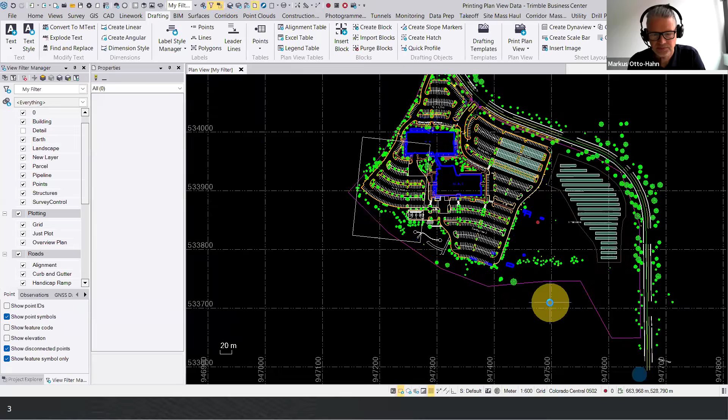We'll first try what happens if I press create. You see that print plan view closes. You get into a new view called sheet view. This is the preview of the plot, where you can also do annotations later.

The simplest way to get to a printout or a PDF is to click this small button at the very bottom right, and check this print to PDF if I want to create a PDF. By clicking OK, the PDF creation runs. That's the first simple workflow to get a fast outprint.

Now I'll do a small variation of this. Again, get to print plan view. Call it window plot. There's always a name given, plan view 1, plan view 2. Sometimes this works, but I would recommend using a speaking name, just to keep the overview.

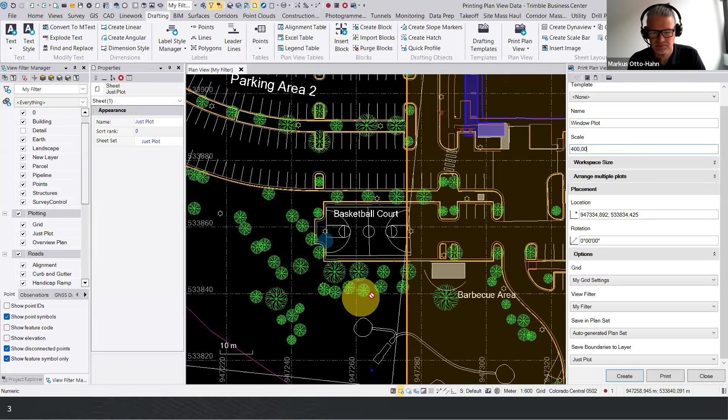What I want to show you is the window plot. I'll just zoom anywhere here to the basketball court. Then I choose here current window. Then you see that the preview covers the current window. And then I'll maybe add a grid this time.

This time as well, I try this print button, which doesn't open the sheet view and brings me directly to plan set, where I can now create a PDF. A small detail about this PDF functionality: it always checks if the name or the PDF file already exists, and then it adds an additional number. So this first outprint was called printing plan view data 1, the second is 2, and so on. But you can always give it an individual name if you want, which I would recommend at the end.

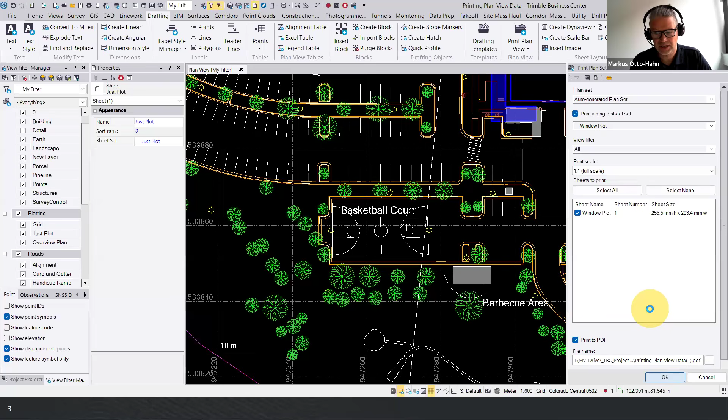So again, PDF output, I think that's my last one. From now on you can imagine how this works at the end of the pipeline.

Okay, what did we create so far? We have in the plan view two boundaries. Here, that's the first one. Oh, it's the second one, the window plot one. It's called window plot. And that is the first one that we created.

If you look at the Project Explorer, you see this in a new node called DynaView Boundary Sets. Here it looks currently a little bit overcomplicated, because you have a DynaView boundary set, and in that a boundary. Again, for the window plot, this makes sense. I will prove this in a few minutes.

Look, if I select here one of the boundaries, they are selected in the graphics. This gives me a little bit better overview of where this boundary is positioned, and the sheet view part, the paper space, the printout preview is handled on the plan set side.

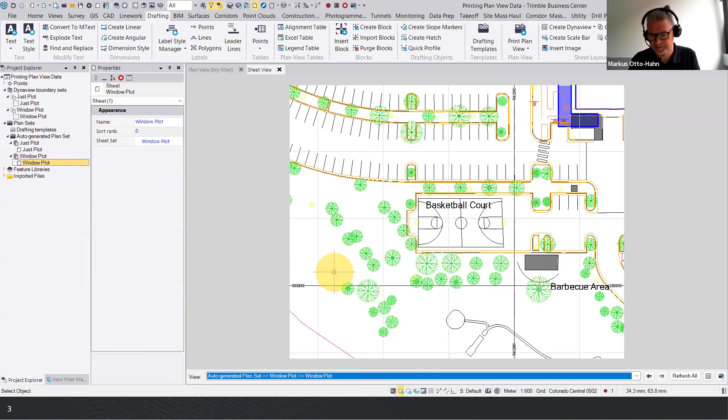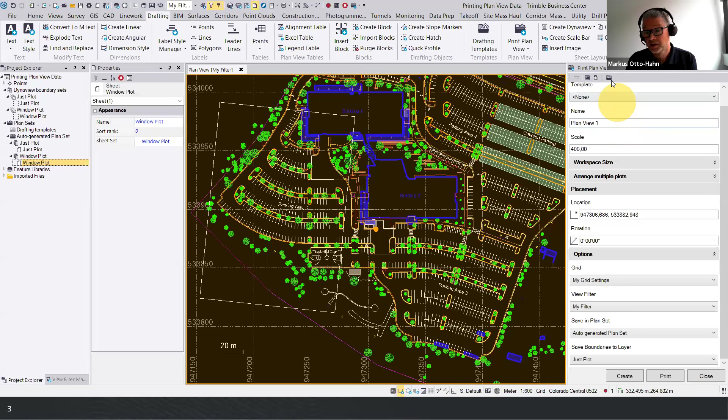Templates can be either stored in the project template, so drafting templates can be stored in the project template, or they can be stored in a folder called drafting templates that can be opened here on the drafting ribbon, or you get into print plan view. That's nearly the only command I'm starting today. And here we've got a shortcut to the drafting templates. So this drafting templates is a folder with templates that we distribute while installing TBC.

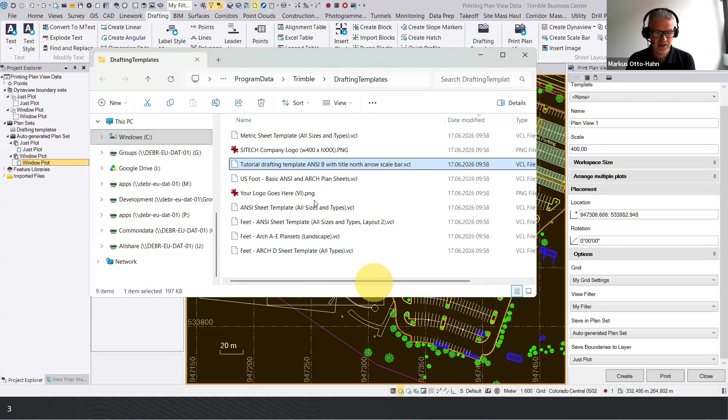There is a lot of different format sizes of plans, not only plan view plans, but as well profiles and cutting and cross-section plans. Regarding the new plot functionality, the drafting template called tutorial drafting template ANSI B with title, north arrow, and scale bar is the most sophisticated. So I put everything in this that is currently supported by plan view templates. And therefore I would recommend you to try this as well.

And that's what we are going to do. I drag this VCL file into the graphic. It's imported automatically. And the drafting template shows up here under plan sets in the drafting template folder. That's the easiest way for this one. Let's have a short look by double clicking on it, how such a template looks like.

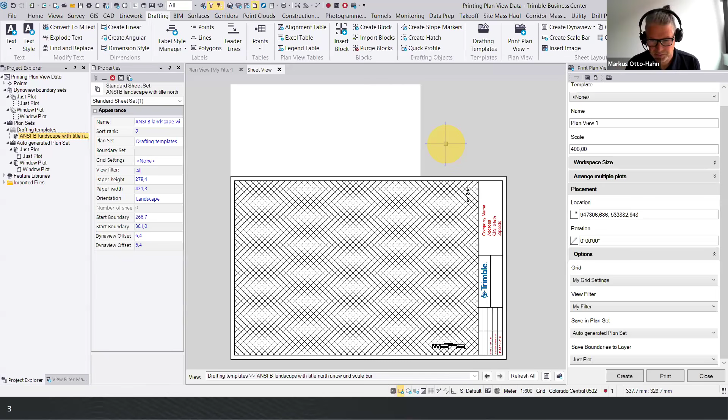Yeah, this one is a small bug that we have. The white area sometimes doesn't fit perfectly. Please ignore this. And so let's have a look at the data. We see some lines there. We've got a scale bar, some text, a bitmap here, a big placeholder for the map to be created.

That's the workspace size that I'm using. Text, bitmaps, and so on. And here in the properties, you see as well additional definitions like the paper height, width, what is here called start boundary width and start boundary height is exactly the area of that placeholder. Then the Dynaview offset is the position of it.

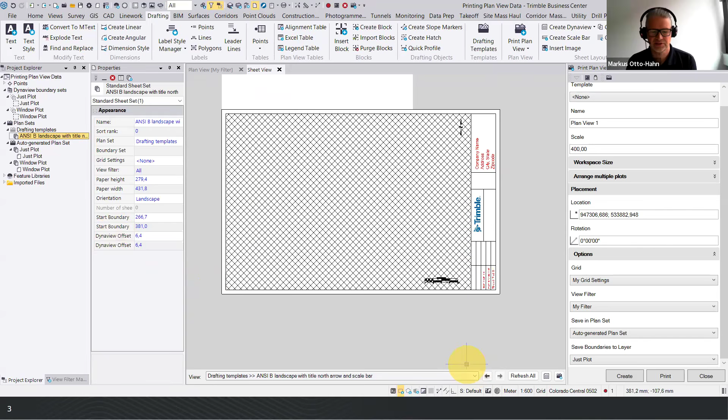I close this, and having imported this and having this under drafting templates, I now have a template here to choose. And maybe you have seen this. As I chose the template, the preview is adjusted automatically because the template contains an area for plotting a workspace size. Yeah, so this means here it's automatically set to custom.

It's read out of the template, and normally I would not manipulate anything else once having used these templates. So I normally close this, and I have only to care about the scale. Let's use a special scale just to show something later, and we call it 'with template'. The blank.

So we skip arrange multiple plots until our next going through this project to this command. We locate it somewhere. Locate it here. Again, the rotation. Let's start with this rotation. No grid. View filter. And that's okay. Just plot. Oh, everything's fine. So now I go to create.

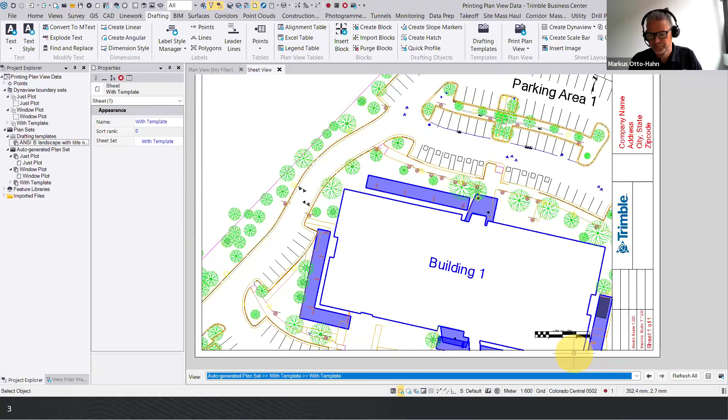And you see how this works out. We've got here the template now filled with the plan view data. You see here the scale bar. The scale bar is an object in TBC. You can select and manipulate it by a lot of properties here.

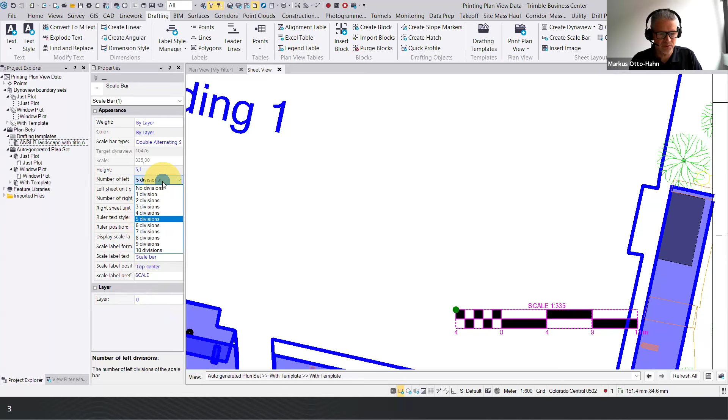So let's, for example, change here to a scale text. So now we've got it displayed here. And as well, maybe change here the number of divisions, whatever. Yeah, so it's a very interactive object that you can position and it just reflects the scale of the printed map. So another way to express the scale is using text.

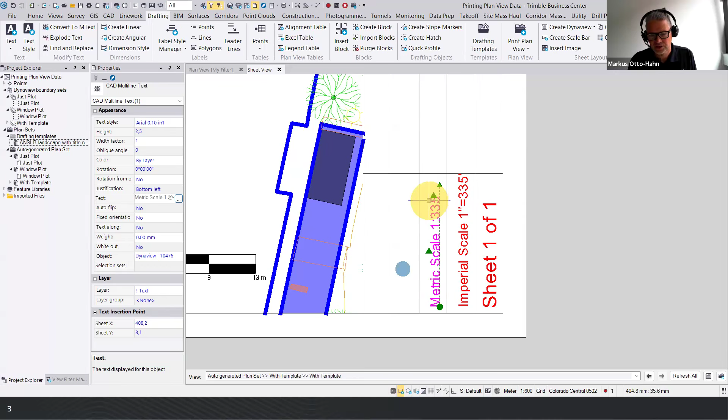What we did here is we used so-called smart text. Smart texts consist of plain text on the one hand, and on the other hand of formulas. Here we've got a formula for the scale number in it, and you can use these for this kind of scale format or for this kind of scale format. It works in different ways.

Here, if you look at the sheet counter, we use another formula on the one hand for the current sheet number, and the second one is for the total count of the sheets.

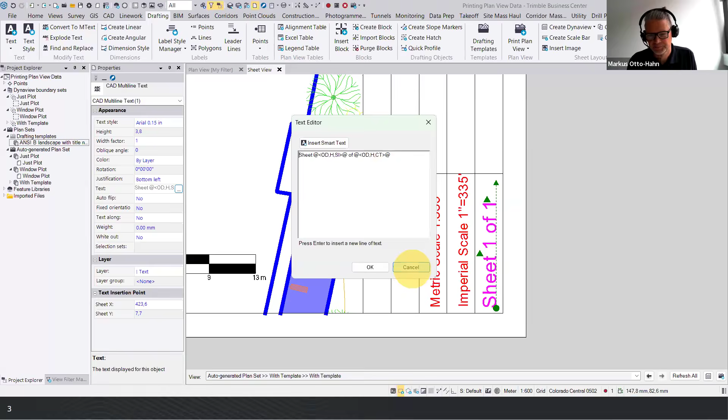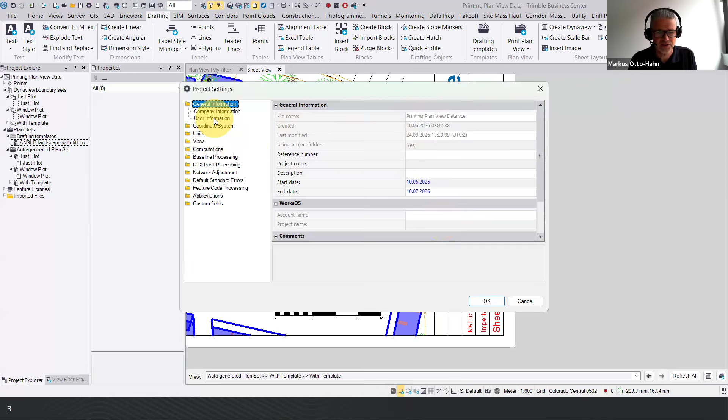You can also work with a lot of additional smart texts. If you go to the project settings, nearly everything that's in the general information, company information, and user information page can be displayed on a sheet by using these smart texts.

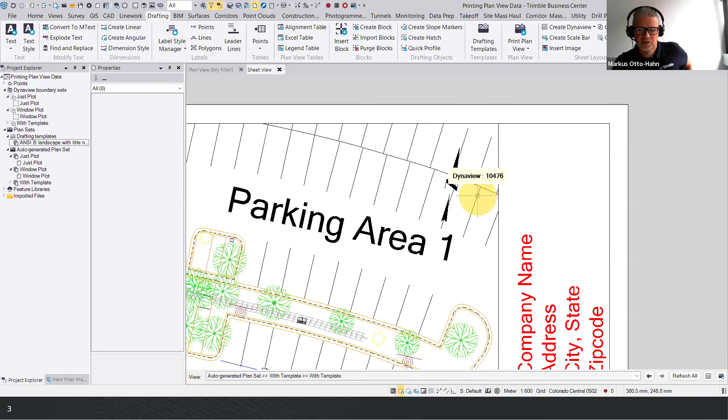So then we've got here a bitmap, that's nothing special. Then we've got here the north arrow that has inclined a little bit if you look at it.

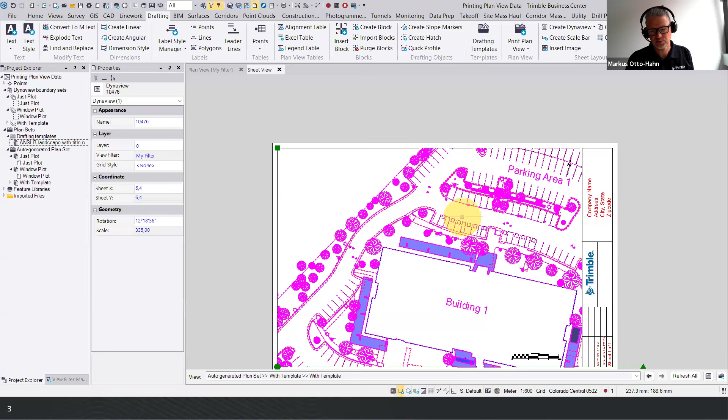And then in the big part here, we've got the dyna view. The dyna view, to give a definition, is more or less a window to the model, to the plan view, most times the plan view. This window works automatically and dynamically, therefore it's called dyna view.

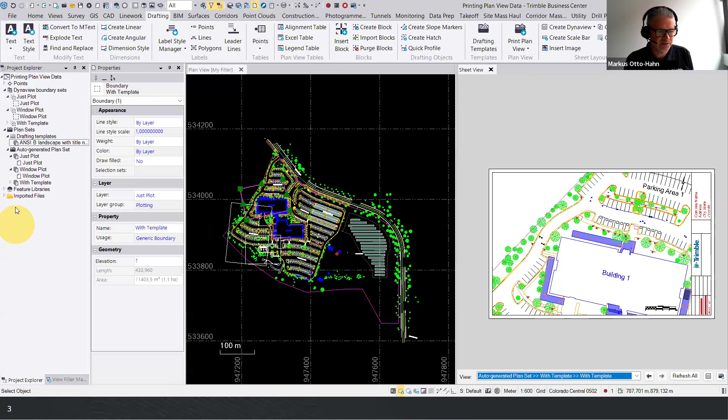I want to show you this by grabbing here the boundary that belongs to that sheet. If I don't know which boundary belongs to it, just a trick: I go to the sheet, check which sheet am I with template, that one. In the properties of the sheet, I can click here at the top, and then jump to this referenced border boundary, and then it's selected in the graphics.

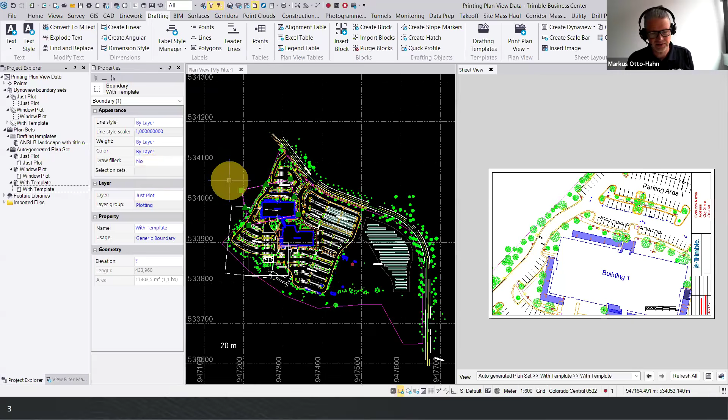And now I want to reposition this. First I hold Control, take it, and move the whole thing. And as you see, this dyna view automatically adjusts, which means I can, after creation of such a boundary, still manipulate it.

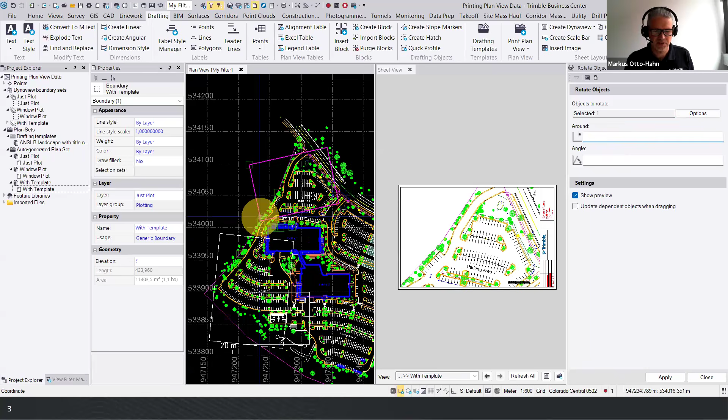I hold the Shift key, right click on it, and can rotate the boundary. Let's rotate it a little bit around here, and let's zoom in here a little bit and look what the north arrow does.

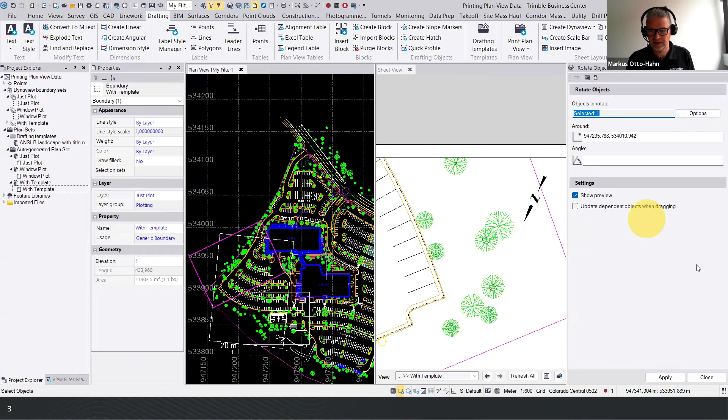Let's go first to this. Isn't it fantastic? The north arrow inclines. That's something, I think, that one should always assume the north arrow does, but it didn't always in the past.

One fantastic thing about TBC, what I really appreciate, is the undo function and everything around plotting. You can do this until the last saved state. That's a really great thing from my perspective.

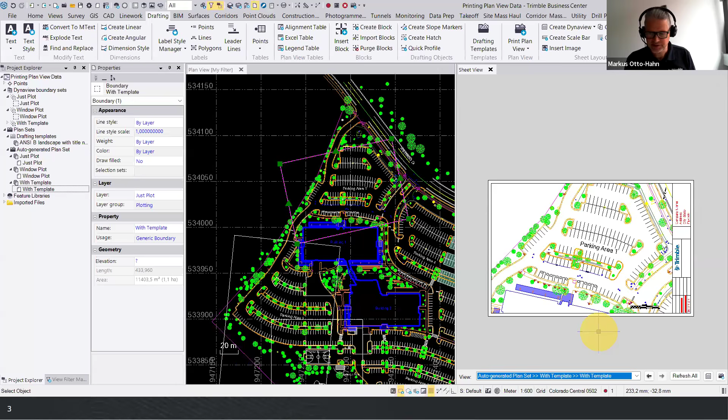Let's get back to this. Last thing about this dyna view: let's get into this. I said that's dynamic - the dyna view updates its graphic automatically from the graphic. That is true in 99% of all cases.

In one case it's not true: if I manipulate data directly in the plan view and have that sheet open, that displays that area. So I'll show this to you. If I manipulate this line, it's not automatically updated because it's already loaded in the graphics, and the reload shouldn't happen all the time when I do something here.

Therefore, in this 1% case, we've got here the refresh all functionality that reloads the data. This would also happen if I closed the sheet view and reopened it, and even in printing it refreshes automatically - just to explain a little bit what this refresh button is for. Then I undo, refresh here, and go ahead to the next.

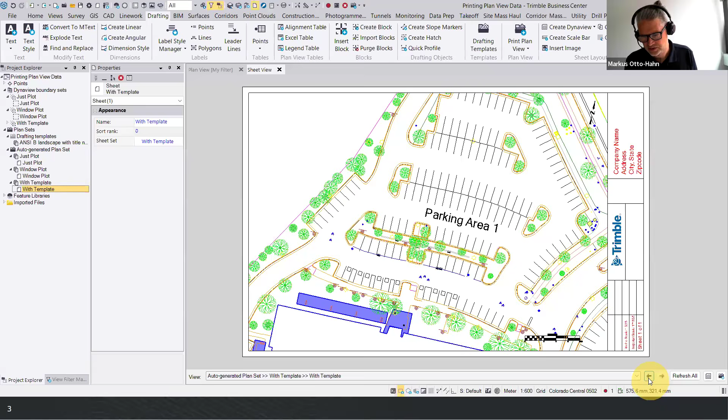Last thing I wanted to teach you about templates is the sheet set, which I've skipped all the time. So I said always here there are the sheets, and if you browse here, you only browse between the sheets, as you see, but in the Project Explorer you can also select the sheet sets, and they have a different appearance than the sheets.

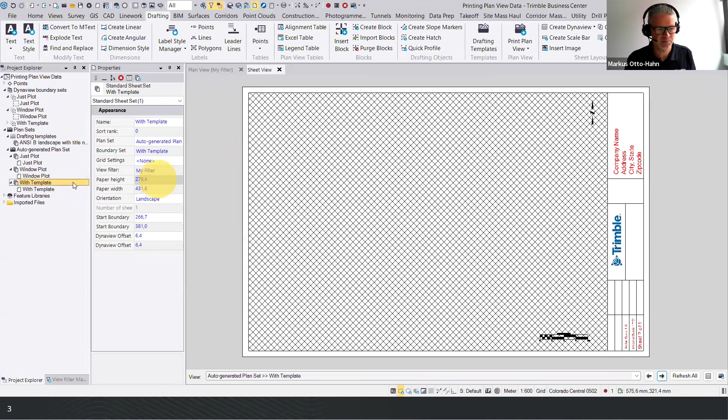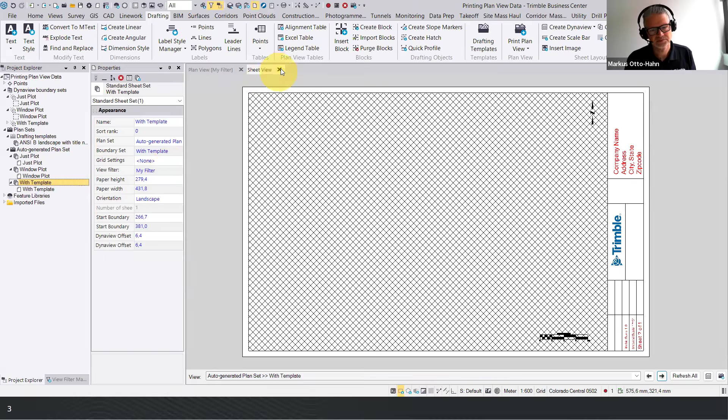What you see, and what is true, is it's a 100% copy of the template. So if you use a template, it's copied from the drafting folder to the plan set that you are using, and it's renamed - that's all. And the sheet set, as I said, somehow governs the behavior of the sheet below it.

Now let's increase our productivity a second time by doing multiple plots at once. I switch off the layer just plot, where all the boundaries were created the first time, and get back to print plan view. I still work with a template because templates are fantastic. I give it a name, an array, scale, whatever.

And then, for the first time, I open this section, arrange multiple plots. There I got two options: in an array or along a line. This will be our first case. This means I can define here an array.

This was formerly called grid, but the grid is as well on the map itself. I can define here an overlap in X and Y and locate the whole thing.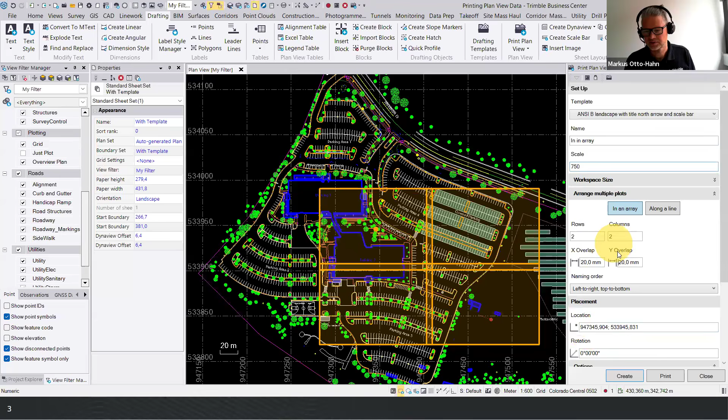My plan was to use here 750. That was it, scale. Place the whole thing, and then you see perfectly what you want to cover. I can rotate it if I want to move it a little bit more in this direction. And then look at the options - my grid.

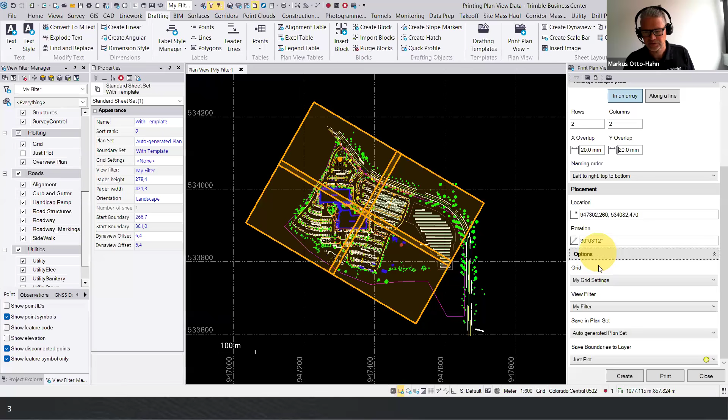My filter - I create another plan set because I want to show you what plan sets are. This means I'm calling this in an array, maybe. You see here, it's just another folder that was created under plan sets.

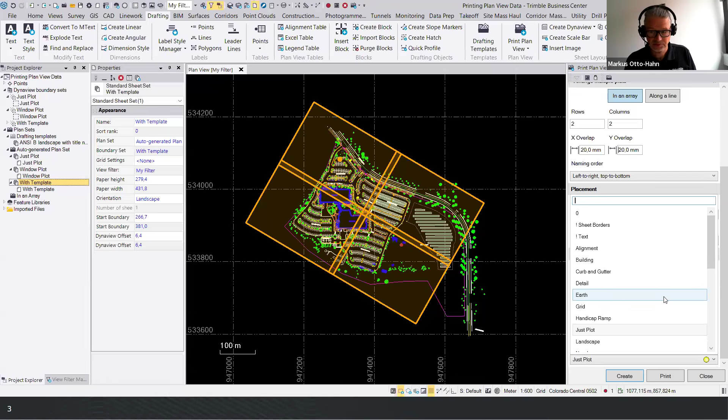And I create a new layer. I do this by typing the blank key. You can type something, and at the bottom of that list you get the new layer entry, and I call this now array boundaries.

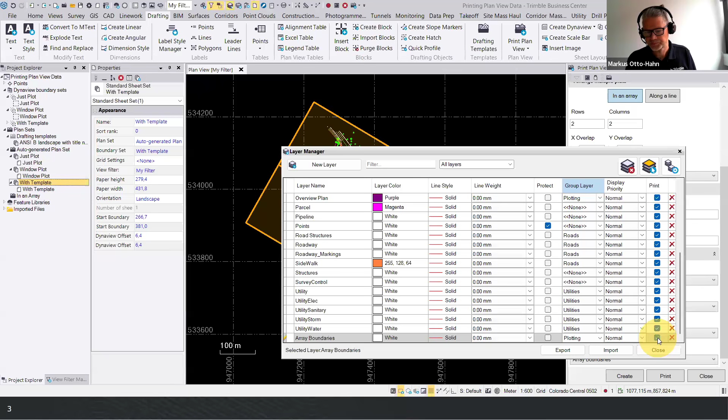Group it under the plotting group, and then I do here a check, which means do not print the boundaries of that. Do not print the layer, do not print the boundaries. Therefore, I uncheck this area. Otherwise, if I would have checked this, the boundaries would appear on each other plots.

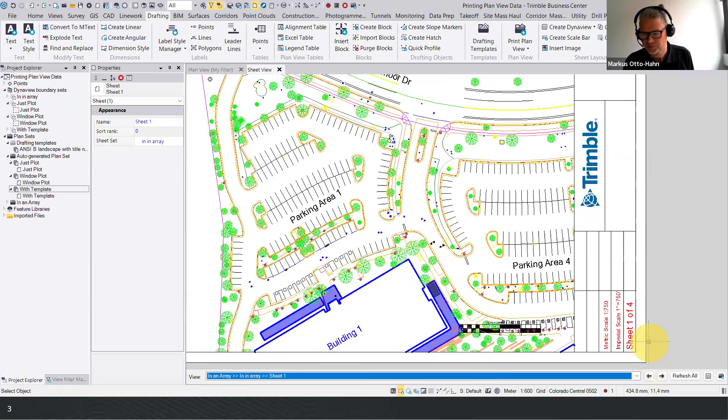Then I go and click on Create, and then the 4 plots are created automatically. You see always that the north arrow inclines. Yeah, we've got now the first reasonable usage of the sheet counter. Then you can browse through all of these sheets.

Let's have a look at my notes. Yeah, back to the DynaView boundary sets. Let's look how they behave here on the Project Explorer side.

We've got here - oh, I get a little bit nervous with all these arrays and thumbs up. Thank you very much, I have to hide them. Okay, where am I? Okay, here we are in an array.

Here it's the plan view, and you see that we have created a DynaView boundary set. We can switch or browse or click through the boundaries. There's an option as well: select members, to quickly see which boundaries belong to this DynaView boundary set.

And we have created here in a new plan set that sheet set, and here we've got 4 sheets. Yeah, and again, you can either use the browse buttons or go here one by one and see how the sheets look like.

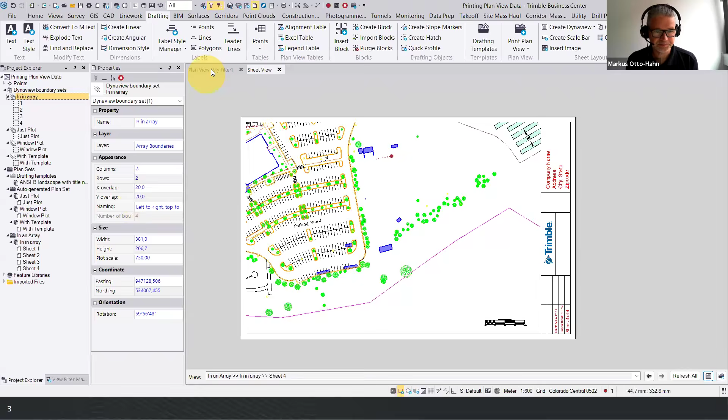Now a few secrets about DynaView boundary sets. Let's go up here. The DynaView boundary sets store the conditions or the properties when they were created. So here you see the properties, and I can change them afterwards, at least if I haven't manipulated them too much.

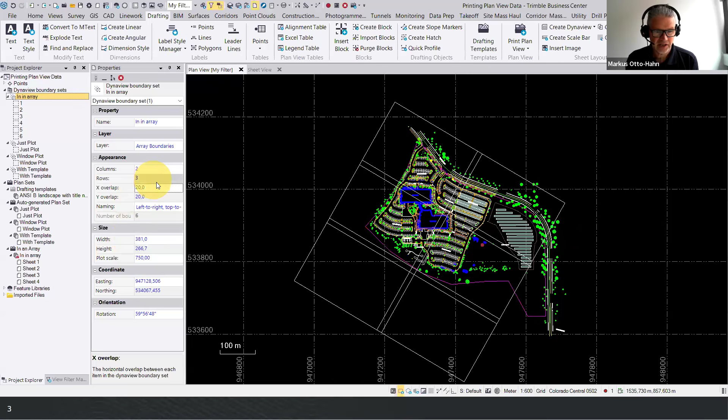So if I want now to have 3 rows, it works. I could change the overlap, I could change the rotation - all of this works. Even the plot scale could be changed afterwards.

But if I manipulate something here, what might happen is that the plots do not automatically update. So I've got now 6 of them, 6 boundaries, but only 4 sheets. And how could I solve this? I right click here on the sheet set, and then I say build sheets, and then the additional ones are added.

But I do not want to have 2 additional ones at the bottom. Therefore, I click undo, get back to the original situation. And I want to have an additional one on the right-hand side, only 1.

Just to mention it, you can as well delete some of them so that this works. Normally, sometimes you have to delete the respective sheet afterwards as well. So sometimes it's good, yeah, with software.

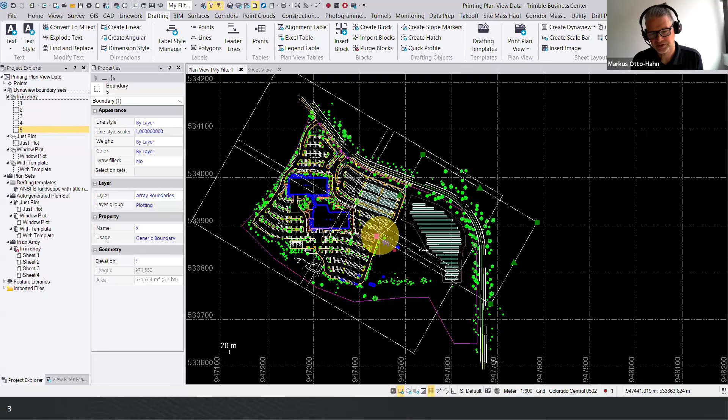Then we have here add new boundary, and then in the middle of the current page an additional boundary appears. So I would always hold the control key, then you can shift the whole thing. You can manipulate the shape afterwards, but I do not know if this is a real use case.

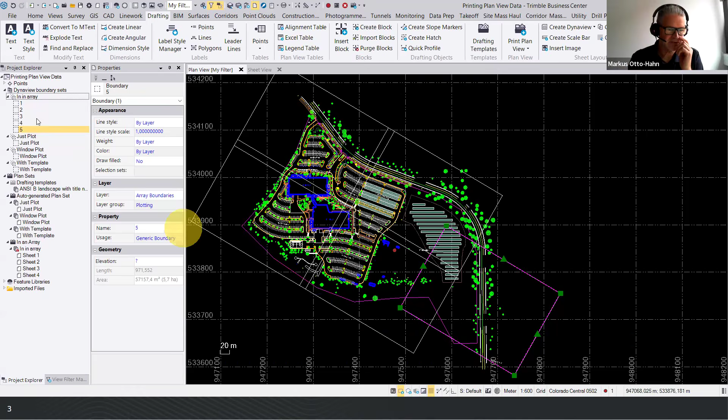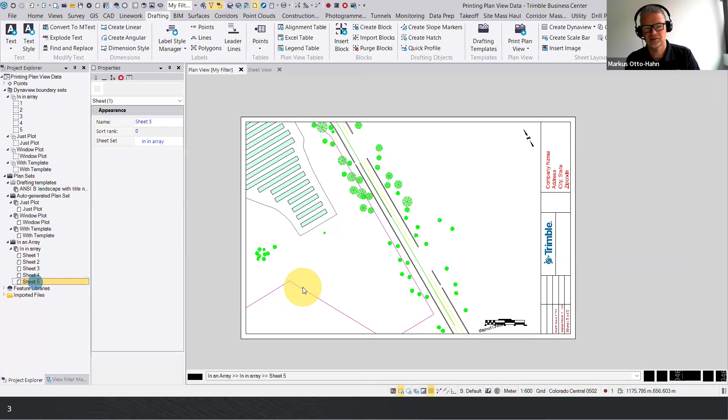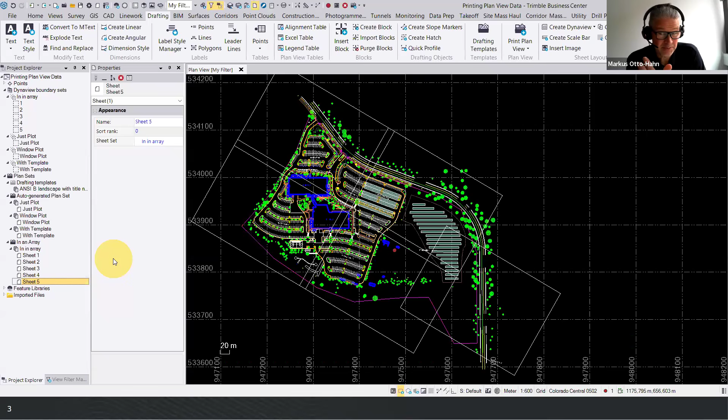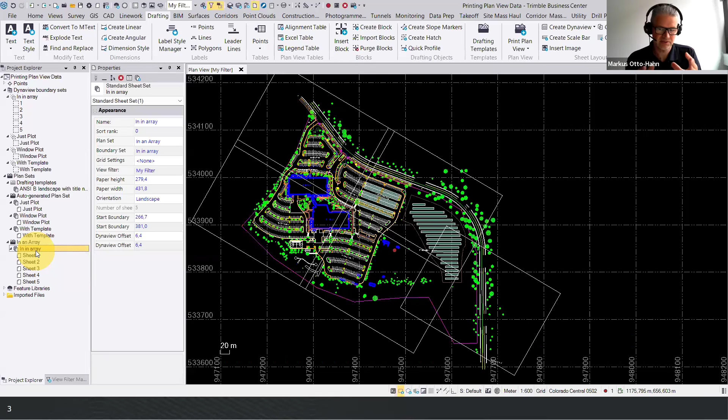If you see here, we added this fifth one. We have to rebuild the sheets here, and then we've got that fifth sheet. So maybe you've seen this small red exclamation mark on the side of the sheet set. We've reduced, from my perspective, 80 to 90% of the cases where these appeared. This exclamation mark says you need to rebuild the sheet set - something changed on the DynaView boundary set. The downside is if you've added any annotations on the sheet, they will be lost if you rebuild. We've reduced the most cases where they appeared formerly, and I think this is much more usable and user friendly now.

Let's get to the last multiple plot functionality. Switch off the array boundaries layer.

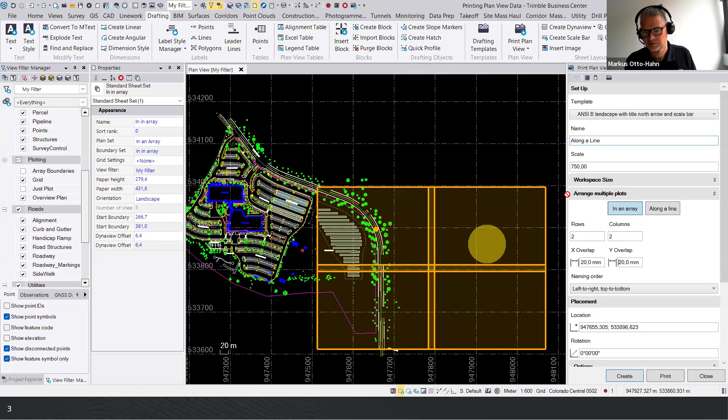Start print plan view, always the same. Give it a name along a line. Scale - now we make smaller ones. And here in the arrange multiple plots area, you can choose along a line. There you choose a line. Don't need an alignment or anything else.

You just click on the graphic, and if you click it, you see the software tries to arrange this as good as possible. However you like this or not, you can always afterward manipulate the individual boundaries, move them, add additional ones, delete ones - this always works. But that gives you a good starting point.

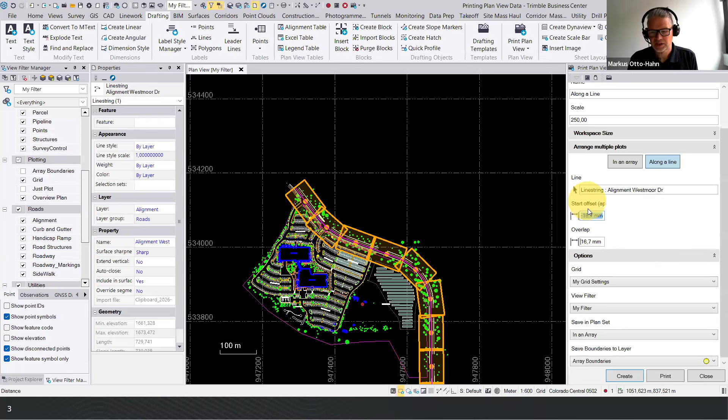Here you can enter additional start offset. So here the line starts somewhere, and the offset is negative away from the line, and on the line it's positive.

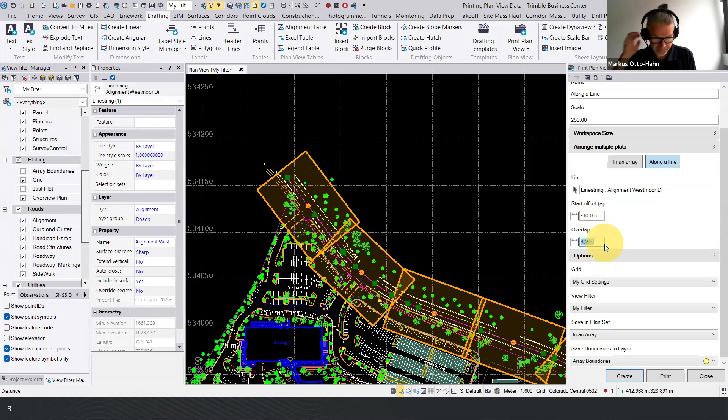But if you do not want to enter sheet units here, there's a small trick. Go here, go to ground, and then you can enter 10 meters, for example, as the unit. Let's work with an overlap as well, with 10 meters, and you see it's all adjusted automatically, and you've got a good starting point from here.

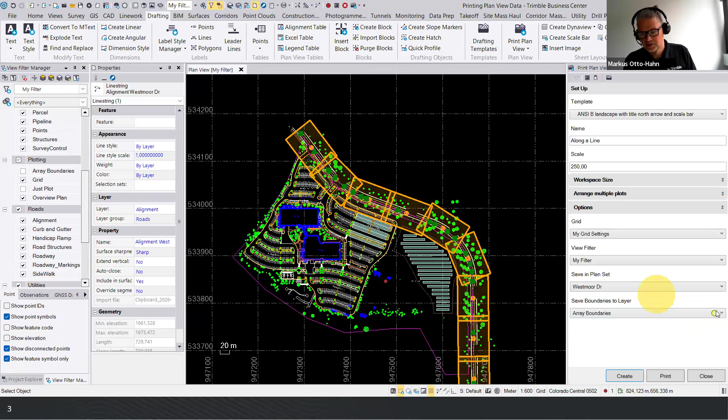Grids, filter, new plan set. Let's create a new plan set. I just want to prove to you that it can be named whatever - it's Westmoor Drive here. And the same with the layer - new layer, Westmoor Drive, again in the right group. So this keeps a little bit of order in the whole thing.

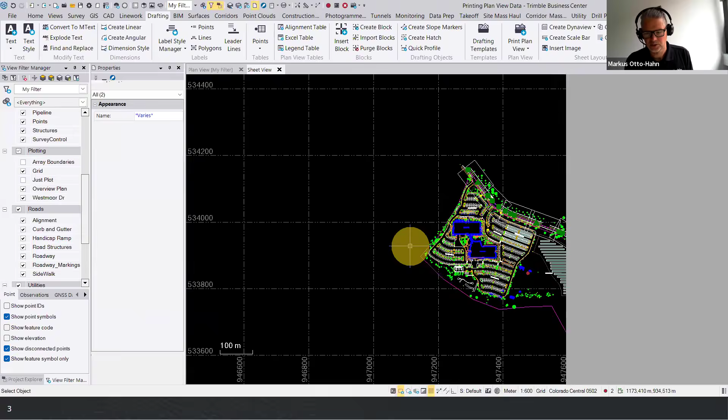Then go to create, and it automatically creates 9 of them. Click through them, go to print, and they will all be exported, or if I go to select all, be put in one PDF file. That's that.

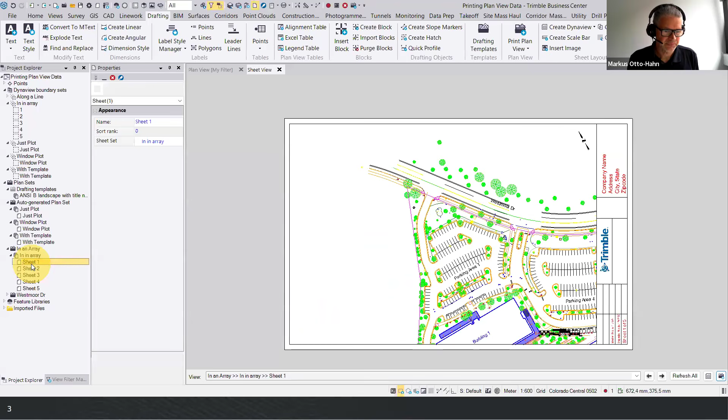I've made a note here to show you again, because repetitive showing makes it easier to learn something. This is how to come from - where are we here - Westmoor Drive along a line. Let's say we're starting from the second sheet, and I want to know which boundary relates to that. I go here to that list, go to that, and in the plan view it's highlighted, and as well here we are on the DynaView boundary set list. That's it.

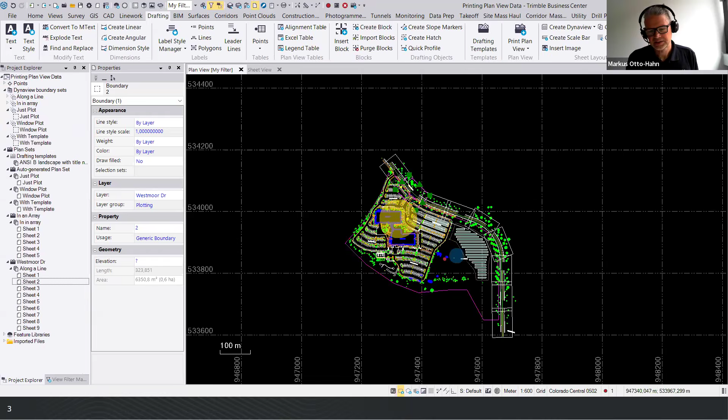Last point today - what I'll show in TBC Live is the creation of a detail plan. Mostly that's not really new, but we implemented it more as a workflow. So let's put it more in a workflow.

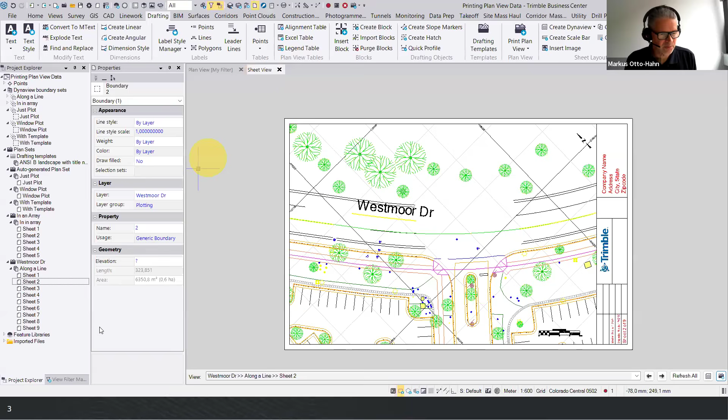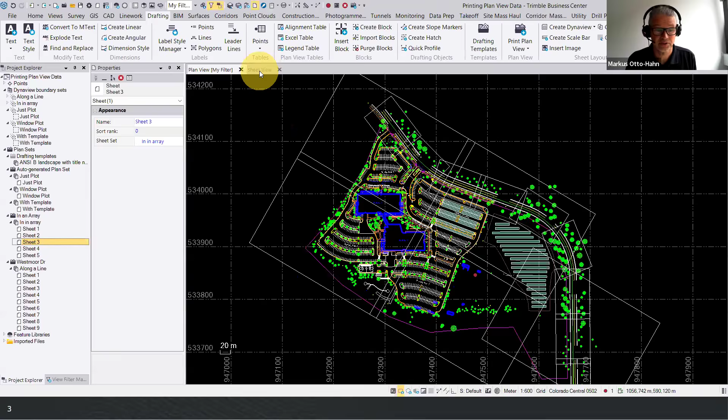Okay, we are in the sheet view. We look up sheet 3. So if you're unsure which sheet you want to put something on, you go here and display it. That's the boundary I want to get to, and from here you can jump directly to the sheet. The sheet is highlighted on the Project Explorer - the highlighted sheet on the Project Explorer is always displayed on the sheet view.

Here we are. And here I want to have a detailed plan of that area - let's say this. Therefore I have here a new button called Add DynaView. It jumps into the already existing create DynaView command. It brings the plan view to the front automatically.

And then it asks you to choose a frame. Here we wrote frame on a plan view - that's not 100% true, I'll have a slide for this later, but most times that's right. Then I needed to have a frame, some reference frame, and the reference frame for DynaView can be any closed line feature in TBC - closed polyline, closed line string, whatever - or a circle.

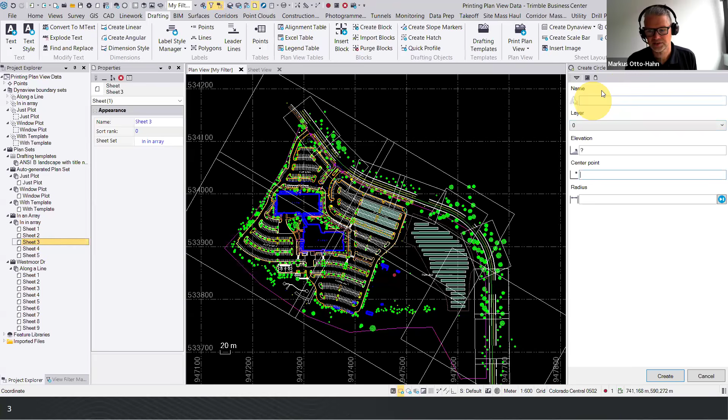And then we've got here the create circle functionality directly linked into this. I get to the center where I want to display, click the center point, select the radius, done. Close the create circle command, select this frame, choose a scale. This is something I tested beforehand - what works?

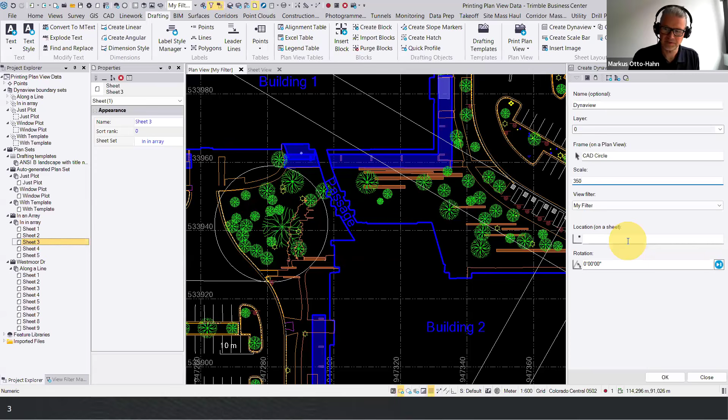Choose a filter, and I prepared some additional data on another filter. So let's get to that filter. Filters are very powerful functionalities in TBC. If you don't use them already, maybe that's a good point to start using them.

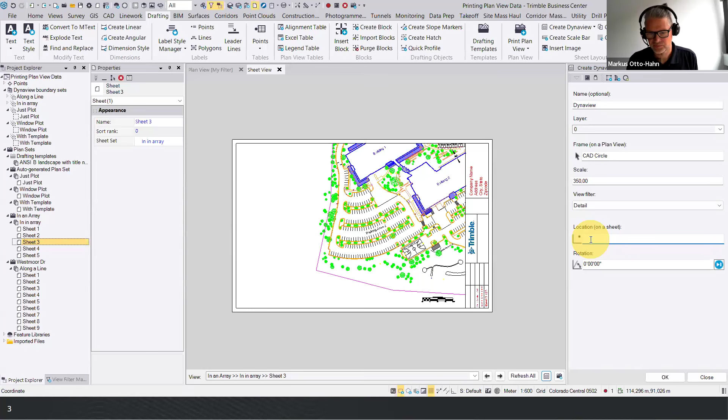As I click here now in the location field, automatically the sheet view is brought into the front, and you can locate your view. Always press OK here, this is maybe something one needs to remember. Then you got your Dynaview, your details displayed here.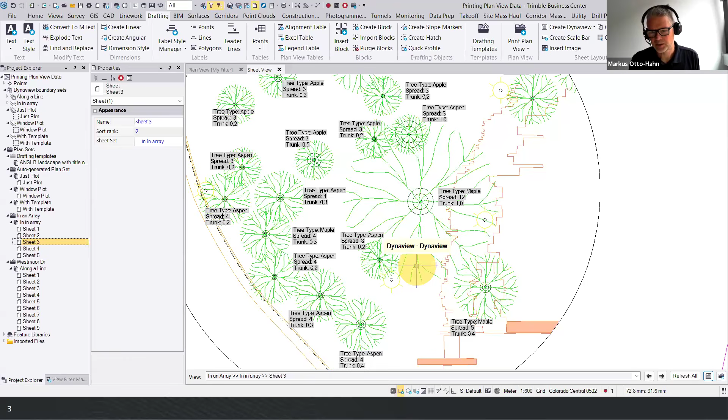On the side, you see that there are additional texts. These texts have whiteouts. These whiteouts, due to a small bug in this version, look on the sheet view still gray, but in reality and on the PDF and in the plot, they will be real whiteouts. This works.

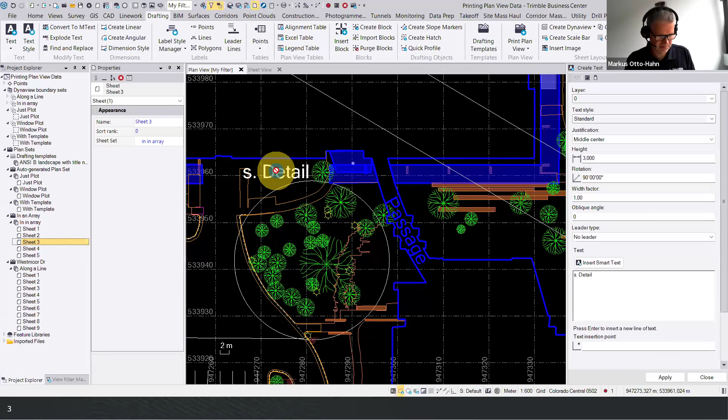Last thing I could do is add, either here or there, additional text, like 'see detail' or something like this. You could do this either on the sheet or on the plan, maybe rather on the sheet. And to see it here, as we learned, in an open sheet you need to click refresh once. That was it.

It's not all, but I hope it's still convincing, and I'm looking forward to your feedback. I haven't shown everything and not explained everything in TBC about plan view plotting in this presentation.

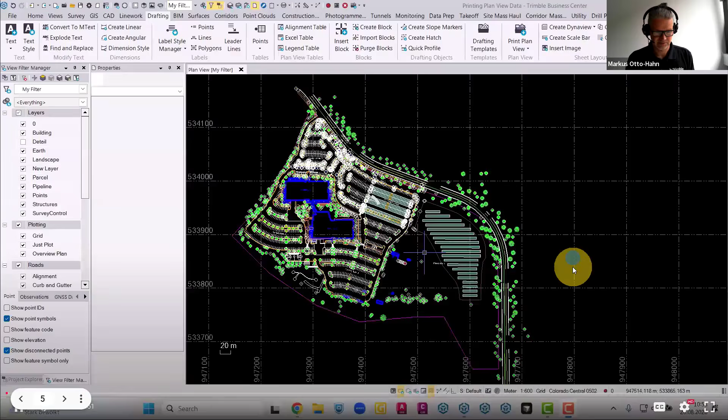All of this presentation is more or less a promotion to get you started with this functionality and to look deeper into the tutorial, because two weeks ago we released a tutorial on that. What you can learn in addition to what I've shown today in the tutorial is more about plan sets, sheet sets, dyna views. You can learn how to create your own template, how to upgrade an existing template, so a 2025.20 template for print plan view, because you need to tweak this a little bit.

How to create an overview plot. Now we've created a detailed plot, but maybe you want to have an overview plot as well, and also basics on profile and cross-section generation, and much, much more. How to get there: you get into the support tab, go to tutorials, and then scroll down until you find 'using CAD and drafting features', expand this, working with drafting, that's it.

Back to the slides. My slides are gone. No, my slides... yeah.

Something that we have implemented in this version as well, 2026.10, and which I now dare to show you because all of the other things worked, is a functionality for how you get, for example, 3D views. This works with all views in TBC on a plan. Maybe that's not yet perfect, but I would try it.

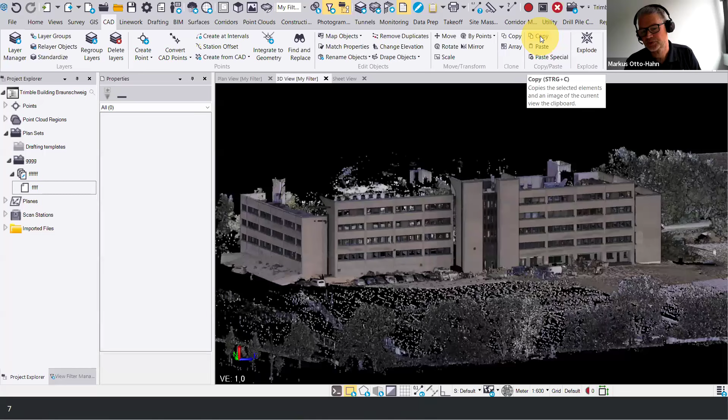Is the copy paste functionality? Yeah, we have implemented here on the CAD tab a copy paste and paste special functionality as in most Windows applications. Copy does, on the one hand, copy vector data, which you can then paste in different TBC projects. But also, as you press copy, a high resolution screenshot is made, as you see here. Takes a few seconds.

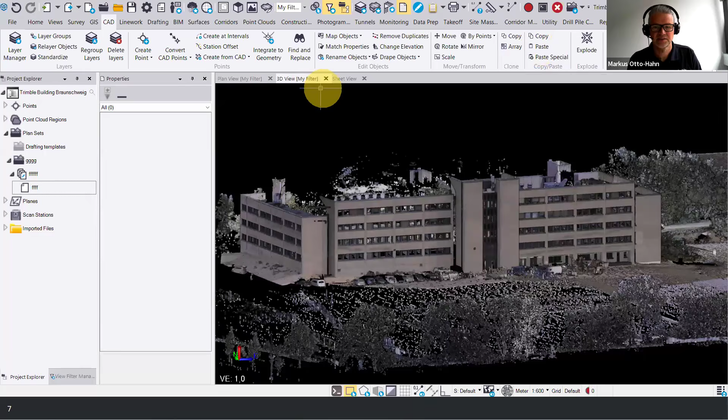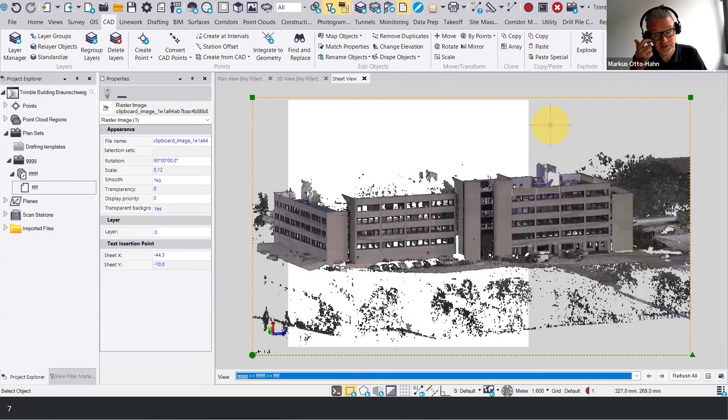And once you have done this, paste functionality is enabled. And if you paste on a sheet, this is a very simple sheet, then always the bitmap is preferred, so the bitmap is pasted. If you are unsure what to paste, use paste special. But in this case, I can tell you just use paste. Then you can position it on any existing sheet and print it. And this works not only with 3D views, but as well with other views.

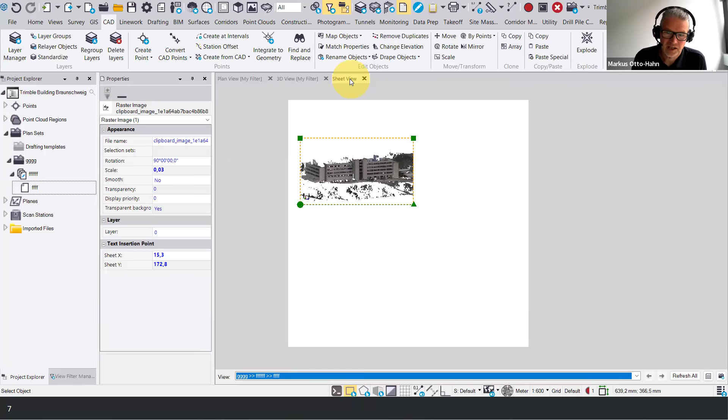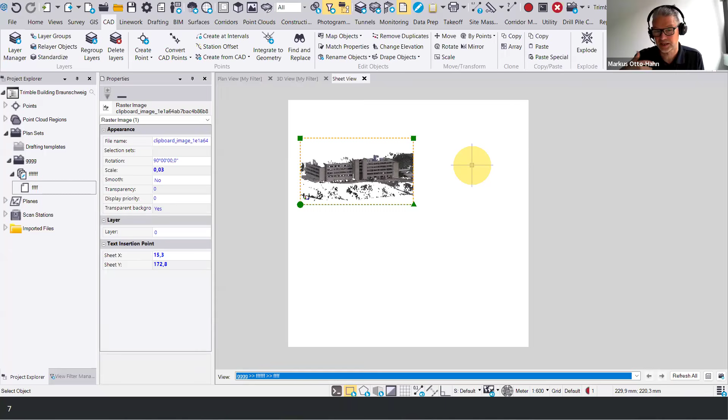The usage from my perspective, on the sheet view, would be the best use case. But we implemented this a little bit as a starting point for discussion. So please, if you have bad comments, bad resolution, or are uncontent with this functionality and all the other functionalities, please feed back to us this information so that we can bring this functionality forward. We don't know all your workflows. You are the expert. I am the realization catalyst, does this word exist in English?

Okay, you can copy views and external screenshots into TBC.

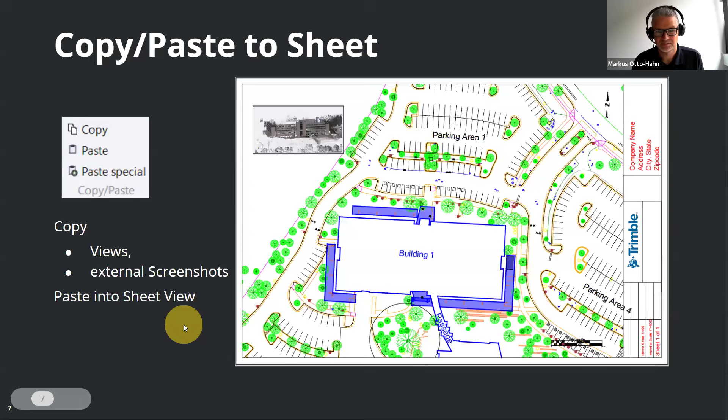You can also paste it into Word or something like this. The last thing I prepared here in a slide, I just want to show this. It's not perfect yet, but it's an option.

I think it's barely known that you can not only use Dynaviews that reference the plan view, but they can also reference cutting planes. If you have line work on a cutting plane, or projected surfaces, or projected cut and fill maps, you can reference a boundary or any other closed linear object on a cutting plane, and integrate this into your plot as well if you want.

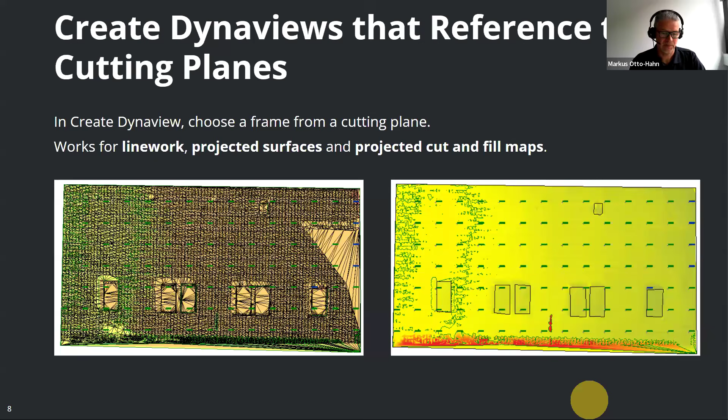So that's the Q&A, Albert.

Okay, thanks Markus, I'll quickly run through a few of these. Darren Wagner asked - yes, all the power hours are recorded, and you should get a notification when the power hour has been posted to the YouTube channel. If you don't see that notification, give it about 3 or 4 days. If you go into the support tab, power hour icon, you'll see all the power hours we've done from the past few years. They're all available on our YouTube channel if you're looking for them.

Then David Babukar - can we set a property in the option pane to point to our own drafting templates folder? So they have their own drafting templates folder - is there a way to point TBC towards that instead of the default, or should they add that into their default folder? What's the option there, Marcus?

Currently, to my knowledge, there's no option to do this. I think this is a requirement rather than a question of how it currently works. Yeah, okay, an enhancement request.

Brom Jensen is asking about resources to modify according to customer needs - a lot of options - and wants to know how they can modify drafting templates to suit customer needs. Are there tutorials or info about how to make that easier, especially with profile views, plan overviews, and cross sections, and how to work with those big plan sets?